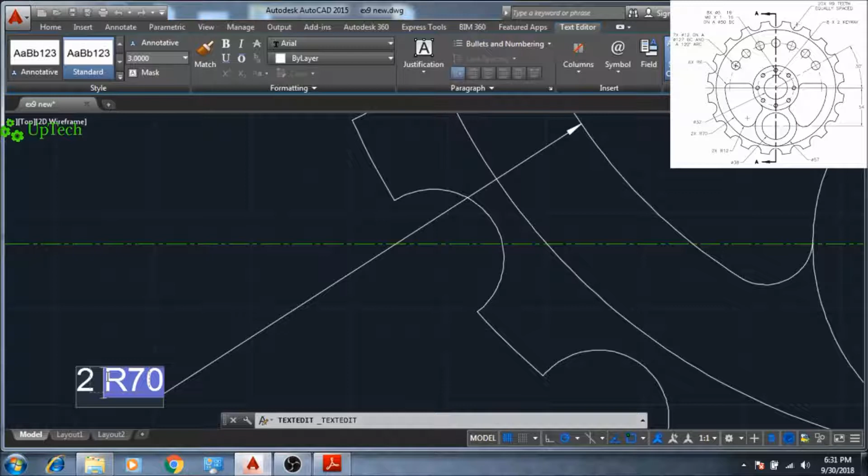As there are two arcs of 70 radius, double click this dimension, the text editor dialog box will open, then type 2 into R70, press escape, and then press yes to save the text.

Next, take the diameter command from the annotate tab, select the circle, and drag mouse outward for placement of dimensions. Repeat the previous command by pressing space, select the circle, and drag mouse outward for placement of dimensions.

Next, take the angular command, select the center line, and drag mouse outward for placement of dimensions. Next, take the linear command from the annotate tab, select the center line, and drag mouse outward for placement of dimensions.

Next, take the radius command from the annotate tab, select the arc, and drag mouse outward for placement of dimensions.

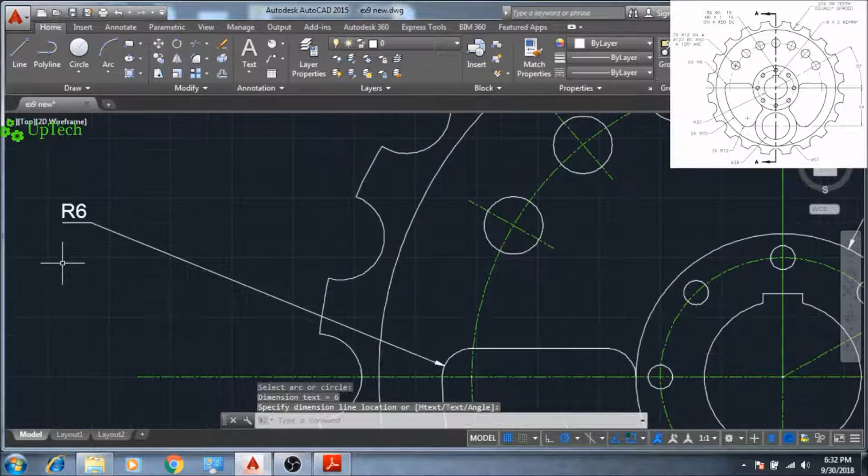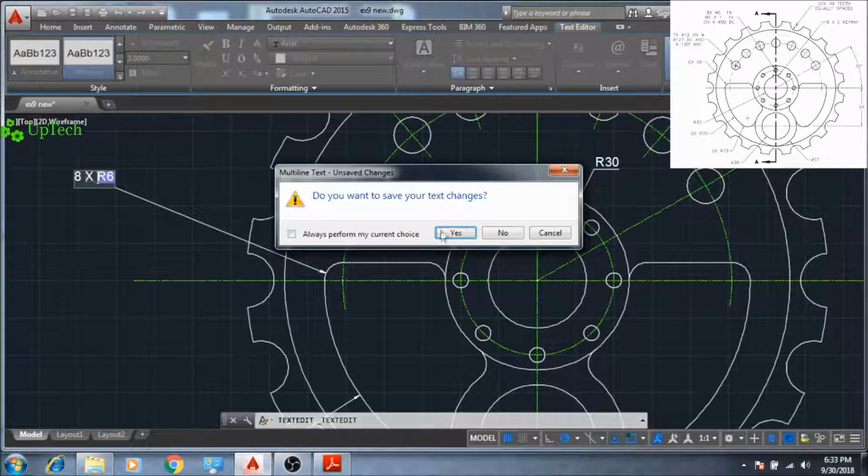As there are 8 arcs in this drawing, double click these dimensions, the text editor dialog box will open, then type 8 into R6, press escape, and then press yes to save the text.

Next, take the diameter command from the annotate tab, select the circle, and drag mouse outward for placement of dimensions. Repeat the previous diameter command by pressing space, select the circle, and drag mouse outward for placement of dimensions.

As there are 8 circles of 5 mm diameter, double click this dimension, the text editor dialog box will open, then type 8 into diameter 5, with having threads of M6.

Into pitch 1, on a base circle BC of diameter. For the diameter symbol, get into the symbols tab and select diameter 50, then press escape and then press yes to save the text.

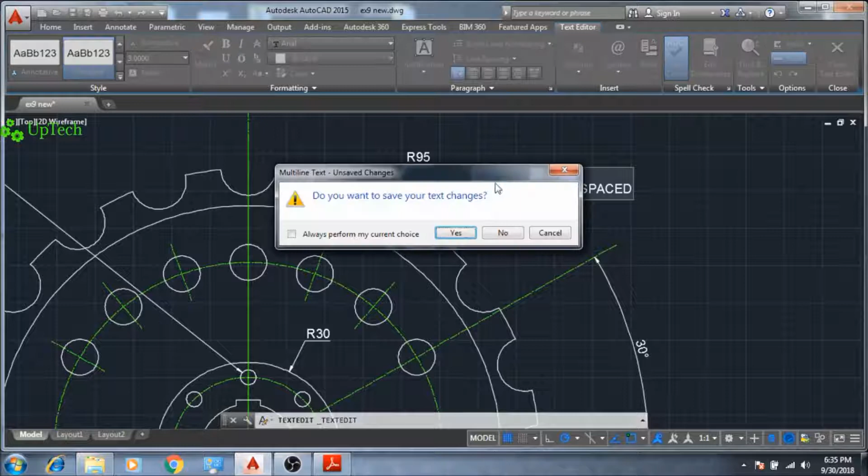Type 20 into R9 and then type TEETH equally spaced. You can also press enter button in this text editor dialog box, then press escape, and then press yes to save the text.

Next, take the diameter command from the annotate tab, select the circle, and drag mouse outward. Double click the dimension again. As there are 7 circles on base circle diameter 127, type 7 into diameter 12, then press enter.

For the diameter symbol, select diameter 127 BC and arc 120 degree. For the degree symbol, again in the symbols tab, press degree ARC. Press enter, then press escape, and then press yes to save the text.

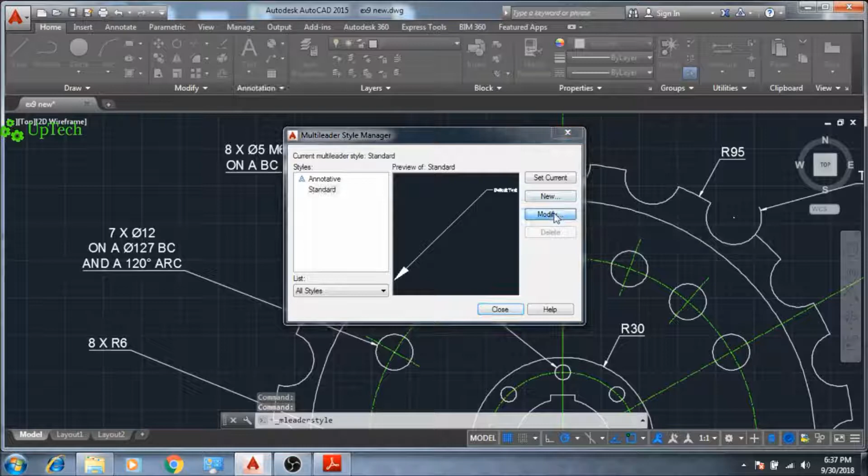Next, for multi-leader, settings have to be done again. Click on the annotate tab, then under multi-leader styles, under modify, under leader format, change arrow size, then under content tab, change text height to 3, then press OK and then press close.

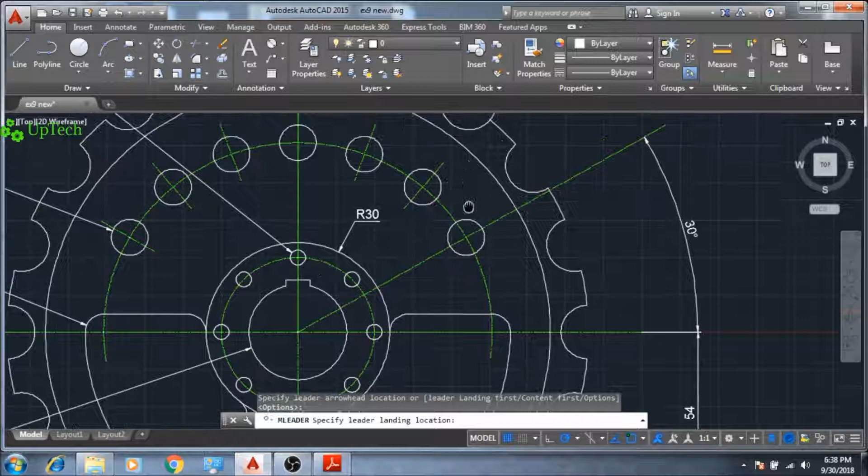Next, take the multi-leader command from the annotate tab, select and drag mouse outward, then type 8 into 2 keyway, then press escape, and then press yes to save the text.

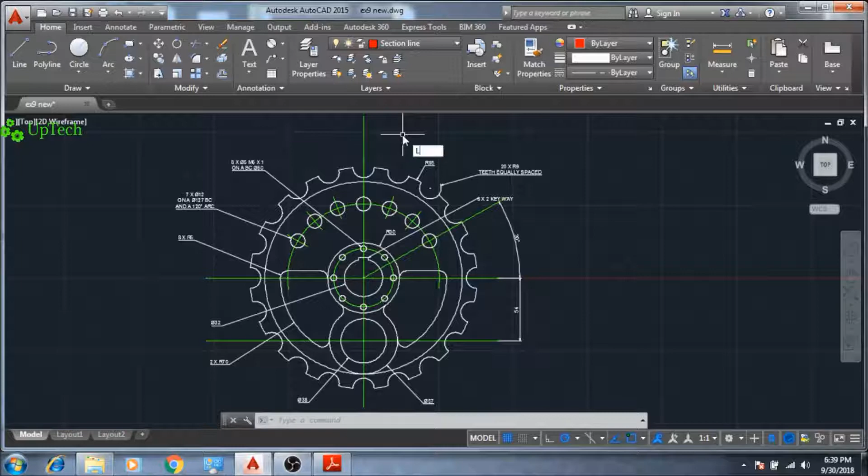As there is a section line in this drawing, change the layer tool from the layer toolbar to section line, which I have already defined in layer properties. Then take line command L, enter first point and then second point, then press escape.

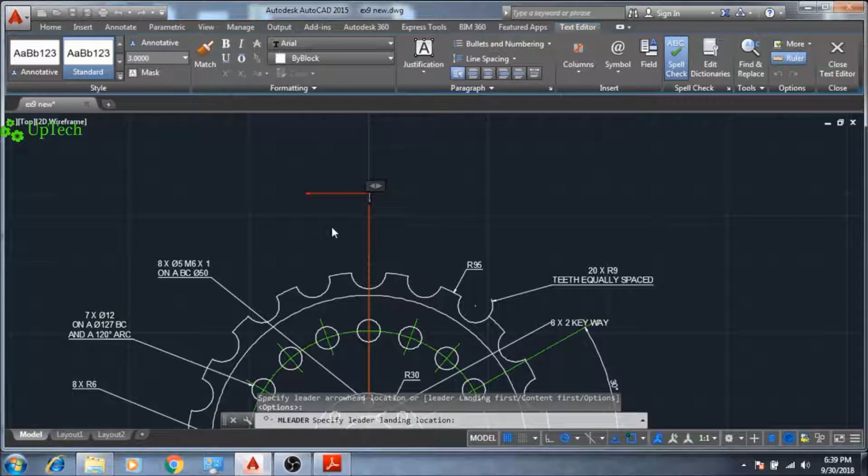Next, take the multi-leader command from the annotate tab, draw a start point and end point for the arrow, press escape, and press yes. Again take multi-leader command from the annotate tab, start point and then ending point, then press escape.

So in this fashion we have drawn this drawing.